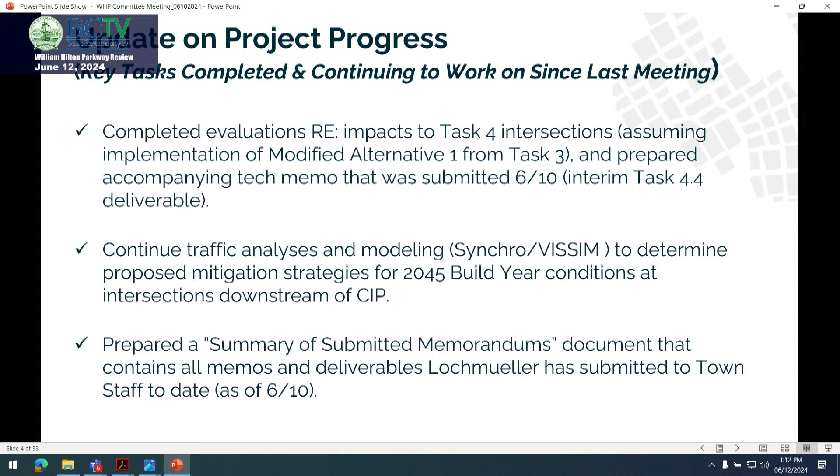From an overall standpoint, I would estimate that we are 75% complete, given that we are well within completion of Task 4.

Task 1, the only remaining item in our scope was one coordination meeting with town staff, and then we can consider that 100% complete. Task 2, as we've mentioned multiple times, is 100% complete. Task 3, we're considering 90%.

The reason for that is we have provided you the deliverable for that. However, we will be submitting or presenting some of those findings to members of council when we engage them formally for the first time next week.

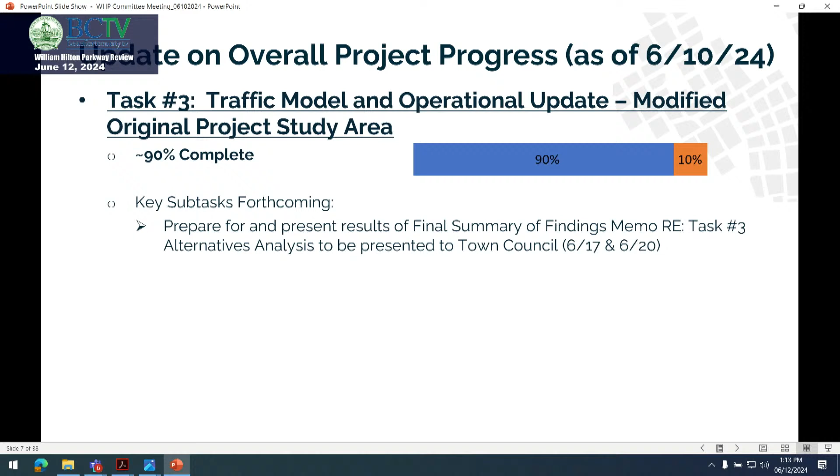After those meetings, we will be able to consider Task 3 100% complete. Task 4, we think we're about halfway done with that because we have an understanding of what the impacts are going to be, and we're working through mitigation strategies for those.

Similar to what we provided to you in Task 3.6, the summary findings memo, that's labeled as Task 4.4 in our scope addendum. We have an interim version that we've submitted to you to understand the impacts earlier this week. We'll finalize that to include the mitigation strategies to formalize the document.

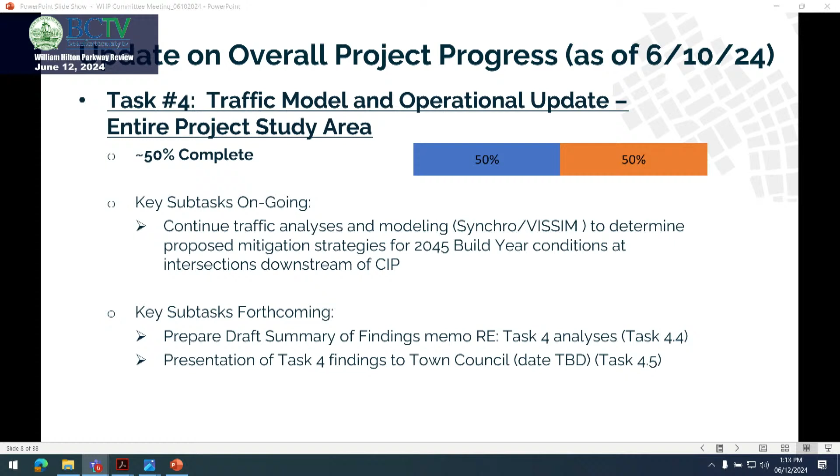And then we'll be presenting that to members of council as well. Task 5 is just the summation of everything we've done to date, put into one comprehensive document to memorialize our work. That'll be after completion of Task 4.

So does anyone have any questions on the progress that we've made thus far? Any questions?

I'm just wondering, we seem to be rushing towards the finish line no matter what, and parts of your work are not finished. Do you expect things to be finished before the 17th of June, or is it going to take more time?

What are you referring to that's not completed? Sorry, what are you referring to that's not completed? Well, you mentioned over there 75% complete, 50% complete.

75 if you consider the entire project. The goal of the meetings that are going to take place on Monday, and then the new council meeting date of June 20th, is to engage the council members for the first time and let them know, and ask any questions, of any project or work we've completed from tasks 1 through 3, which again, we provided the formal deliverable for task 3 at the last meeting.

And then we've also provided to them the interim findings for impacts that Michelle is going to be speaking to today. So we have completed all of the subject deliverables up through task 3, and we've got an interim deliverable ready for discussions with council members for task 4.4.

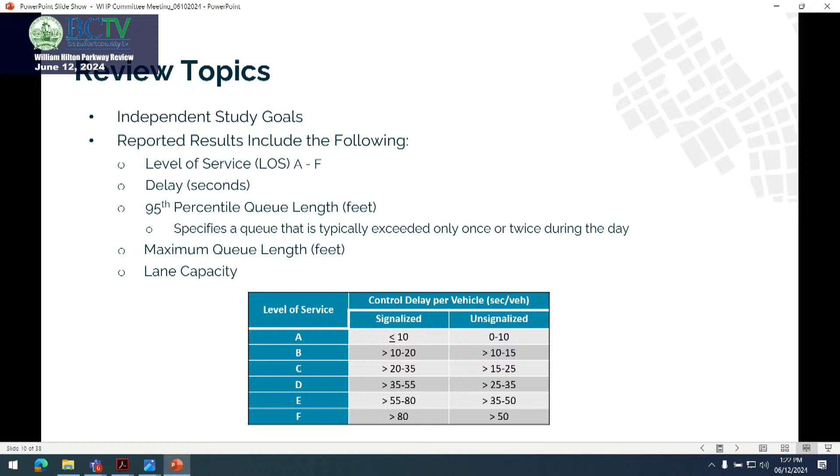So I wanted to briefly review those topics as we consider some of the other impacts that Michelle's going to present after this. If we go to the next slide, there's one more thing I want to review with everybody, which is our traffic volumes.

We have presented these numerous times in various fashions, whether slideshow presentations to this committee, graphics in the appendices of presentations we've given, or included in various reports. Again, I want to reiterate that all of our hourly volumes were collected in 2023, and that has been the basis for all of our scenarios.

These are hourly volumes, not just daily volumes. We do look at both sets of data for different things, but the main bulk of our analysis has been based on hourly volumes. Specifically, we use the 30th highest day for traffic volumes to ensure the analysis is responsible and reflects peak conditions without over- or underestimating any traffic volumes. That is a standard practice.

Kate, I think you cut out. Oh, I'm sorry. And it looks like she dropped. Yeah, she may have dropped.

Michelle, while we're waiting on Kate, would you mind finishing out this slide? I can take over from here. I believe what Kate was saying is that we were using the 30th highest day for our traffic volumes, and that helps. I'll let her join again if she's able.

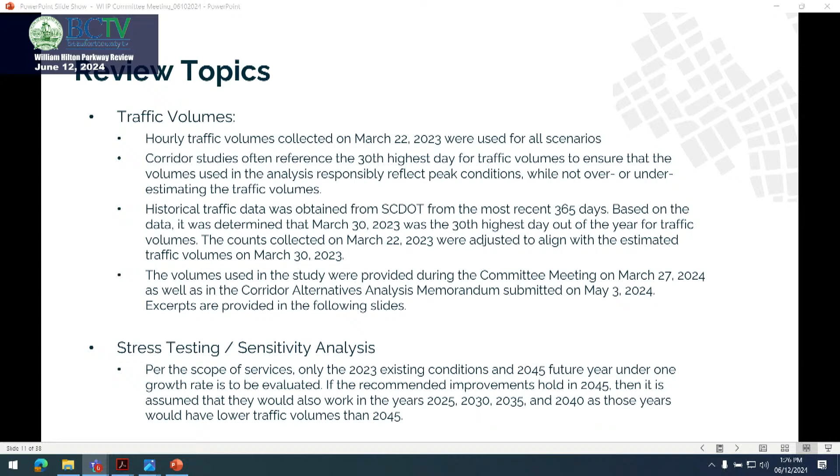All right, do we have any questions? Okay. Does not appear to be any. Okay, thank you very much.

Good afternoon, thank you for having me. Before I get into the downstream impacts, I'm actually going to build off of some of what Kate said.

We have provided some excerpts of our traffic volumes to help show the hourly volumes we used in our analysis. As Kate mentioned, all of the traffic volumes were provided as part of the committee meeting on March 27th, as well as within our corridor alternatives analysis memorandum, which we submitted on May 3rd.

I'm going to focus just west of intersection 9, which is Squire Pope. As shown in the column on the left, which is our morning peak hour, we have approximately 2,800 vehicles traveling in the eastbound direction. This includes those 156 left turns shown in the intersection 9 box in the top left, the 2,620 through vehicles, and the 2 right turning vehicles.

In the evening, which is in the right column, just west of Squire Pope at intersection 9, we have approximately 3,000 vehicles traveling in the westbound direction. This includes the 2,687 through vehicles, as well as the 2 northbound left turns and the 341 southbound right turns to get to the volumes just west of Squire Pope.

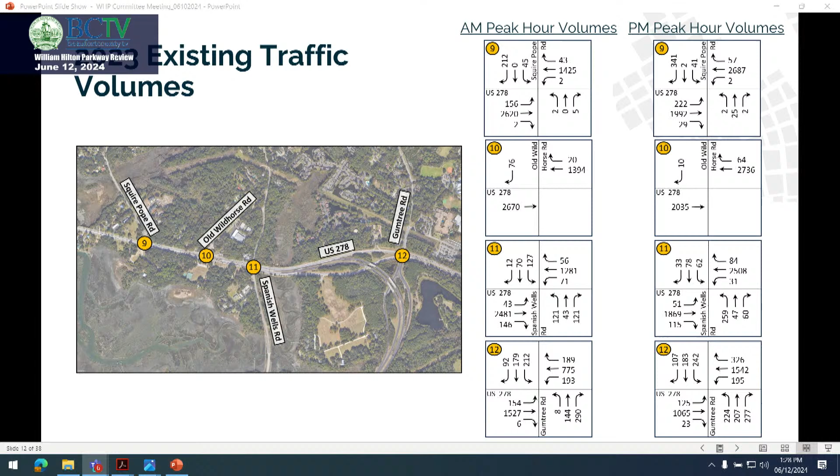We then took those volumes and grew them by our determined growth rate of 0.56%. Just west of intersection 9 at Squire Pope, we have approximately 3,150 vehicles traveling eastbound during the morning, and approximately 3,400 vehicles traveling westbound in the evening. These volumes were used for the 2045 scenarios. These are just an excerpt from some of the major intersections we're looking at. All of the traffic volumes for all of the intersections have been provided.

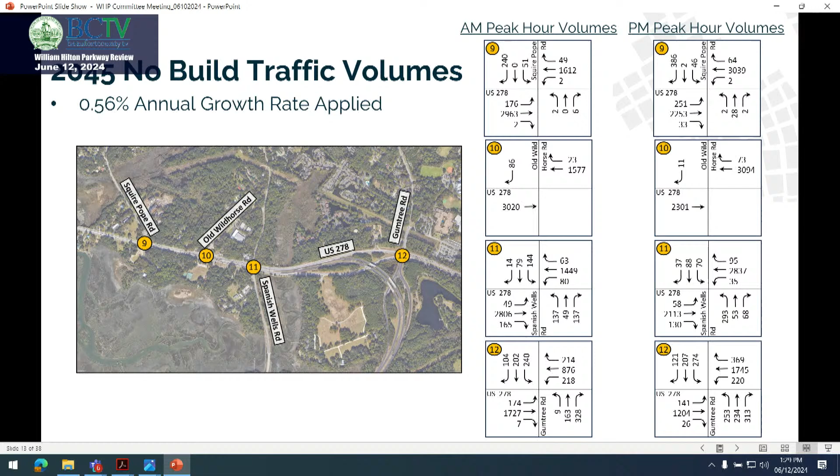Now I'd like to present our findings to date on Task 4 for our scope of services. We previously analyzed 4 alternatives intended to improve operating conditions along US 278 between Moss Creek Drive and Gumtree Road. After review of the findings and discussion with SCDOT, Lochmueller was directed by the Town of Hilton Head Island to pursue Alternative 1, SCDOT Modified Recommended Preferred, with additional modifications to provide a single eastbound left turn lane and a single southbound right turn lane at US 278 and Squire Pope. As you may recall, the SCDOT alternative included 2 eastbound left turn lanes and 2 southbound right turn lanes here. Our modified alternative run reduces each of these to just 1 lane.

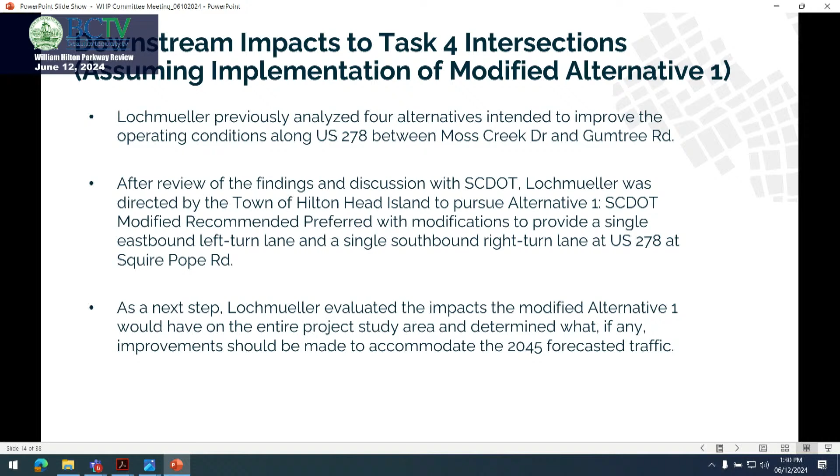We have now evaluated the impacts that the modified alternative 1 would have on the entire project study area, and are working to determine what, if any, improvements should be made to accommodate the 2045 forecasted traffic east of Gumtree and along Cross Island Parkway. This analysis includes the entire study area as shown here. Our previous analysis for the alternatives only included the intersections between Moss Creek and Gumtree. We have now extended our study to the intersections along US 278 through Indigo Run, as well as along the Cross Island Parkway towards Sea Pines Circle.

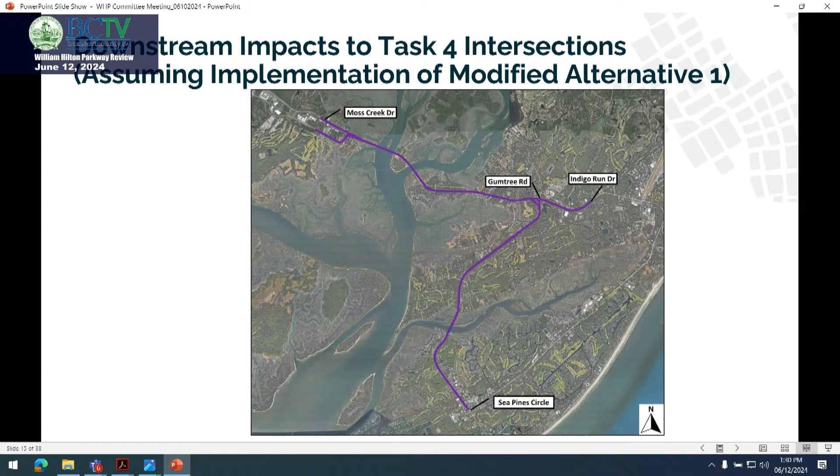We have provided travel time runs for the modified alternative 1, which includes the SCDOT alternative as well as a single eastbound left turn lane and southbound right turn lane at Squire Pope. Before we get into the numbers, I want to clarify that these values are from VISSIM. We have previously presented the 2045 no-build travel times, and the values shown in this table for the 2045 no-build match what we have previously presented for that scenario. However, we have not yet presented the modified alternative 1 travel times. The travel times with respect to the alternatives we previously presented were completed using Synchro, not VISSIM. The intention of those Synchro travel times was to serve as a comparison between each of the alternatives we evaluated, so alternatives 1 through 4.

They were not intended to serve as final travel time calculations, as those values were to be calculated using VISSIM as part of Task 4, which we are now in. We also noted previously that we would expect the VISSIM results to be a little more pronounced compared to Synchro, because VISSIM is a micro-simulation tool, which is able to accurately replicate individual vehicles and their interactions within complex traffic streams better than Synchro.

As such, our final travel time results for the modified alternative 1, again assuming no changes along US 278 east of Gumtree or along Cross Island Parkway towards Sea Pines, are presented in this table. These values do include a thorough evaluation and optimization of the adaptive signals along US 278 within the modified alternative 1 intersections, to help us ensure the signals are operating as efficiently as possible.

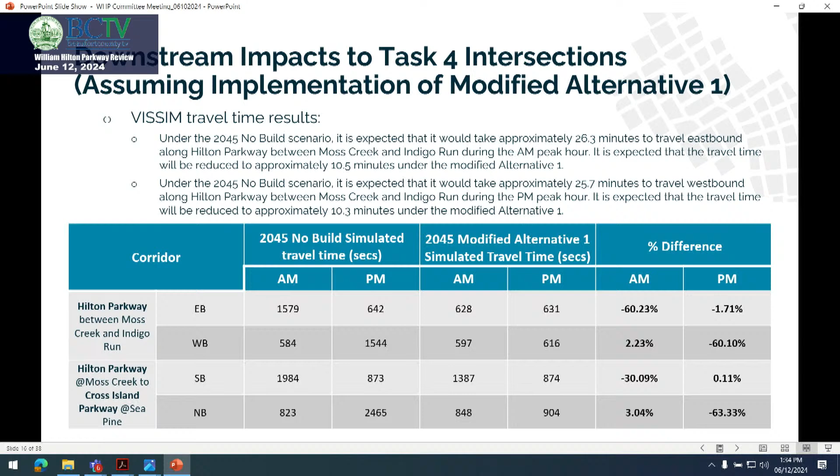So we've provided some videos here to help you visualize the 2045 modified alternative 1. Again, we have no improvements along US 278 east of Gumtree or along Cross Island Parkway. So this is in the morning, in the eastbound direction, on Hilton Parkway.

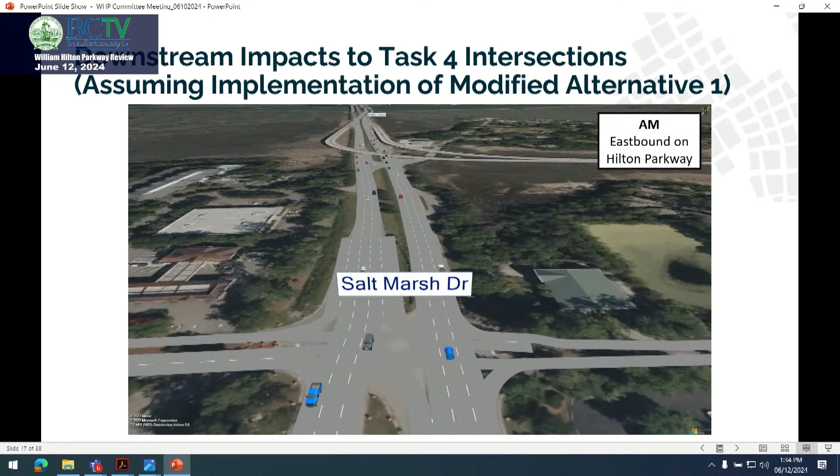So as you can see here, the 6-lane section is operating acceptably. We're not seeing any queuing back, from what we saw in the 2045 no-build, as well as in some of the existing conditions.

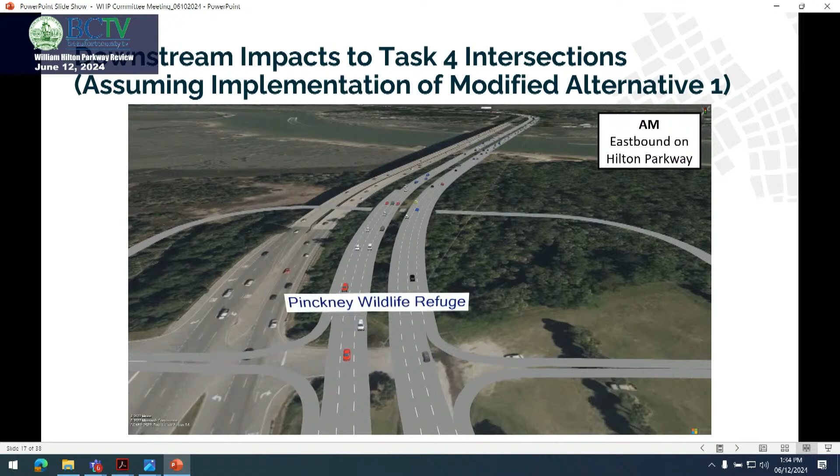As we go towards the Pinckney Wildlife Refuge, this right-in, right-out is now also operating well. You can see, as you look in the video, the platoon of those eastbound vehicles. There's quite a few eastbound vehicles, but the 6-lane section is able to accommodate them.

You can see it's a steady stream of eastbound vehicles in the morning. And then as we start approaching Squire Pope, we can see that it's operating pretty well.

The changes with the modified alternative 1 are at this point in time. Again, this video is just one snapshot. It's not reflective of the entire hour, but you can see generally everything is working well. The platoons are typically able to, at least in this area, clear within 1 cycle length.

And now we're getting into the impacts starting downstream here. We did have improvements at Gumtree, which are reflected here. And then you can start to see those downstream impacts as you look towards past Gumtree, up towards Wilborn Road. We are starting to experience some queuing at this point.

You can see some long queues at Wilborn and Jarvis Park, and also through Pembroke at this point too. You can see a constant stream of vehicles.

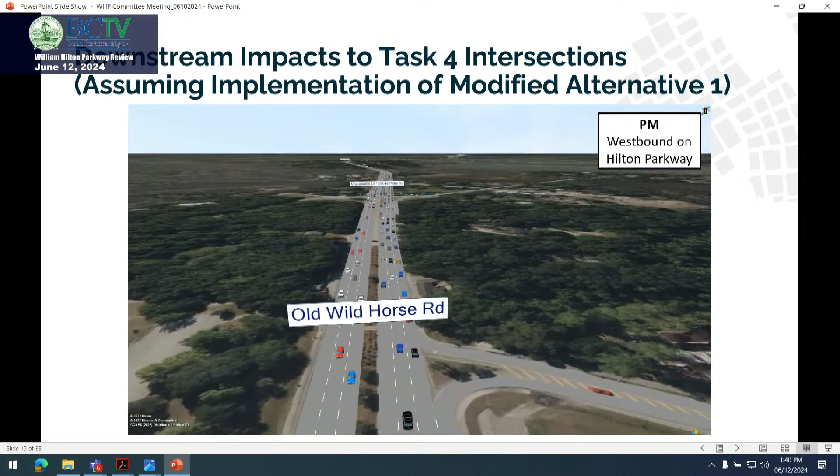And that agrees with the travel time runs that I just presented to you. Once they start hitting the greens, we're able to get them through these intersections now.

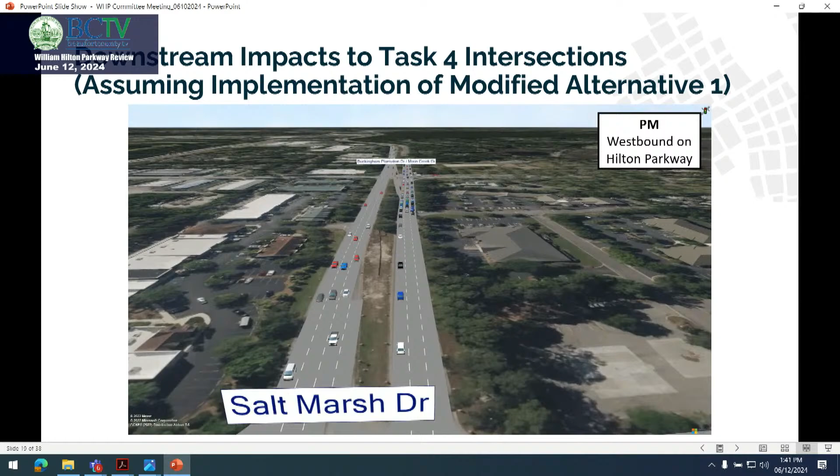And this will follow through to Moss Creek. So as you can see here, it's largely expected to operate acceptably all the way from the beginning at Gumtree through Moss Creek. You can see the platoon starting to clear from that signal, which just turned green.

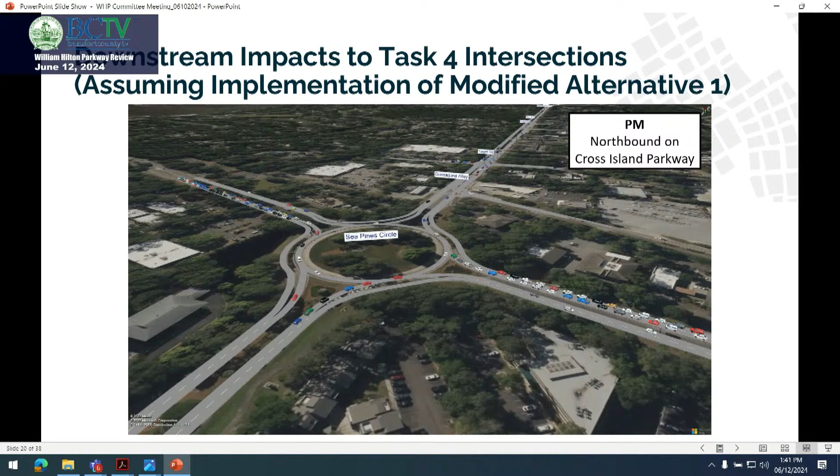And then we have one more video for you, which is the PM along Cross Island Parkway. Here at the very beginning, you can already see some of the queuing that we're realizing in the 2045 scenario at Sea Pines Circle. Both our eastbound and westbound directions are really struggling to get into this roundabout due to the large number of vehicles entering in.

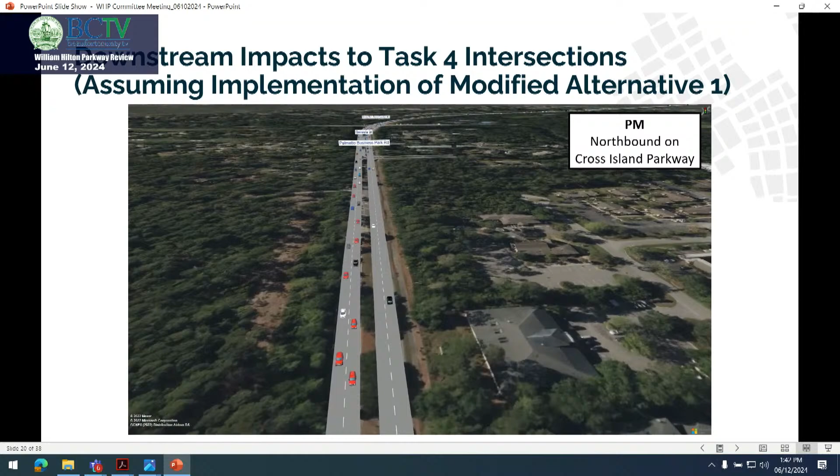They just can't find a gap to get in there. But one thing that's different here in the PM versus the AM is that while there's queuing at the roundabout, along Cross Island Parkway at Palmetto Bay there's not too many issues here in the PM. The queuing all happens outside of it, whereas in the morning there was queuing southbound along this road because the roundabout was pushing it there. Here it's the other directions having impacts, just due to the direction of flow in the AM versus the PM. We'd expect that any improvements to Sea Pines would help mitigate all of these issues we're seeing.

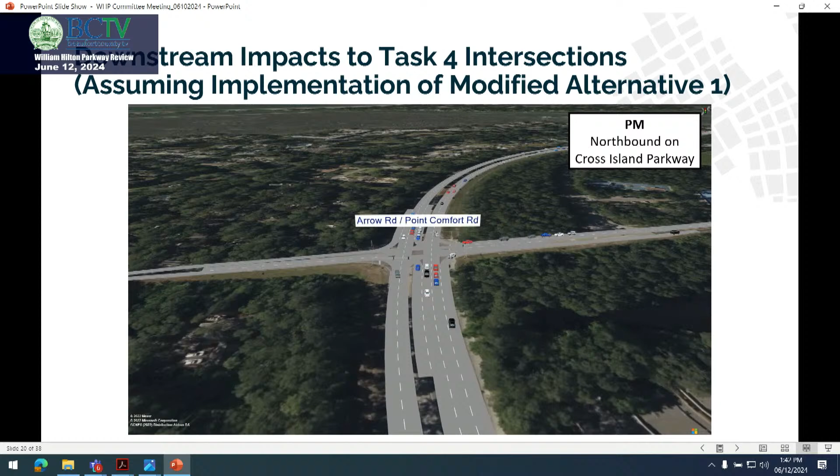Okay, so now to put some numbers to this, the operating conditions results from VISSIM for the modified Alternative 1 are provided in these tables here. We've included the operating conditions for each intersection in the appendix of this presentation for reference. However, we've provided the results for intersections of note here, some of our key intersections that we're looking at.

As shown here, the intersections between Squire Pope and Gumtree are expected to operate acceptably overall during the AM and PM peak hours. Each of our signalized intersections is expected to have an LOS D or better, which is our target LOS for an intersection overall. And the individual approaches are expected to operate with an LOS E or better, which, as Kate mentioned, is typically considered acceptable during peak hours for some of the side street approaches.

But while the intersections overall are expected to operate acceptably, there are a few movements we've called out here that are expected to either experience long delays, resulting in an LOS F for that specific movement—again, not necessarily for the approach or the intersection—or maybe some long queues.

So at Squire Pope, I'll focus for a minute, because this is where we put in one eastbound left turn lane and one southbound right turn lane. We worked a lot on this intersection, especially with respect to the adaptive signals, to help make it run as efficiently as possible. But even still, we're expecting the eastbound left turn to fail during our AM peak hour, largely due to the delay at that point. The southbound left turn, part of the capacity with the southbound approach there, is also expected to fail during the PM peak hour. And the southbound right turn, we're expecting to have some long queues of over 500 feet during the PM peak hour.

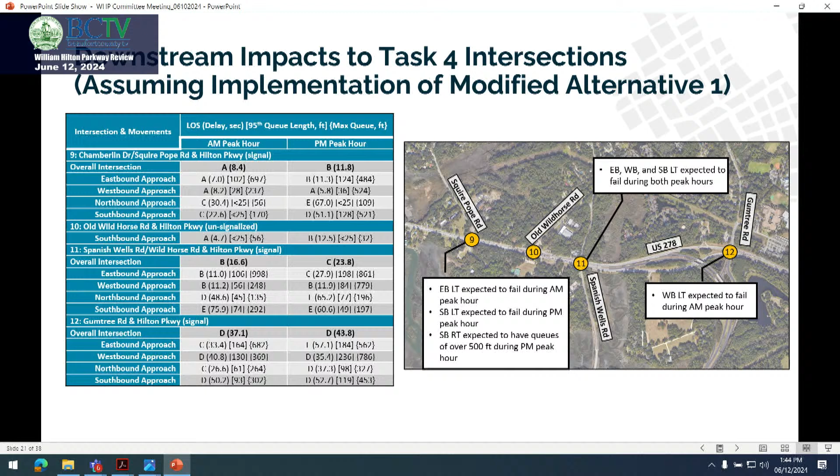So on this slide here, again, we can see overall, if we look at these black bolded numbers for the intersections that are signalized, we're expecting them to operate acceptably. Each of the intersections should have an LOS D or better, and generally each of the approaches will also have an LOS E or better. There is an exception highlighted in red for the northbound approach at Wilborn Road and Jarvis Park. Before I go any further, we've made no modifications to these intersections here—the intersections in the previous slide had the modified Alternative 1 improvements, but these intersections have no improvements to them. This is kind of a no-build of the modified Alternative 1.

Can I ask a question? Yes. So how does this differ from what we have today?

These have the 2045 traffic volumes in them. So you're operating on about 4,000 vehicles per hour? I wouldn't say 4,000 exactly. We have our 2023 existing traffic counts, grown annually by 0.56 percent from there. I can pull those numbers up for you, but it would take a moment.

What I'd like to understand is, except for the adaptive traffic system, there are no changes to the roadways, left-hand turns, or right-hand turns. It's just the same as we have today, right? Correct, these intersections remain the same.

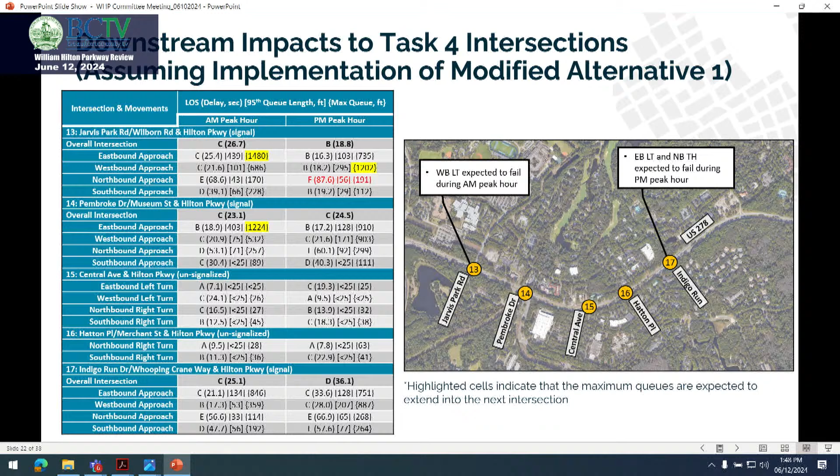I've also called out Sea Pines Circle. As you saw in the video, there's a lot of queuing we're seeing at this circle, and we're expecting that in 2045 as well. Again, we've made no modifications to the lanes or striping here. This assumes it is as it is today, only with the 2045 traffic volumes.

You can see in the morning some approaches are failing, specifically the eastbound approach, which is what we saw in the video. The southbound approach is not failing; however, we saw long queues for that southbound approach, and those queues hurt the side street approaches as they struggle to find a gap because of the roundabout, making it hard to execute a left turn from an unsignalized approach.

So at intersections further north, like Dunnagans, as those queues on the southbound approach extend all the way back, they start to struggle to make a left turn out. We would assume that whenever we improve this roundabout, a lot of those issues would be mitigated simply by fixing it. We might not actually need to look at or improve any of those other intersections, but we're still testing some ideas here.

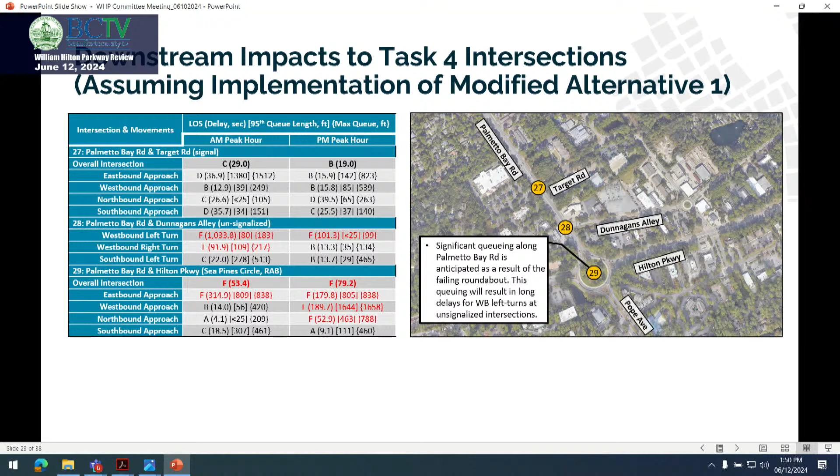As far as next steps, we've shown you the results of the modified Alternative 1 and the impacts it's having on the intersections downstream of Gumtree Road and Cross Island Parkway. I've highlighted a few things today that we're looking at further to see what, if any, improvements we could make that might help.

These improvements include reconfiguring intersections or turn lanes to potentially improve efficiency, and we may also look at adding lanes to help improve capacity. But most certainly, we are looking at improvements to the Sea Pines roundabout, as it's really performing the worst out of all the study intersections at this point, so we're going to be looking at that closely.

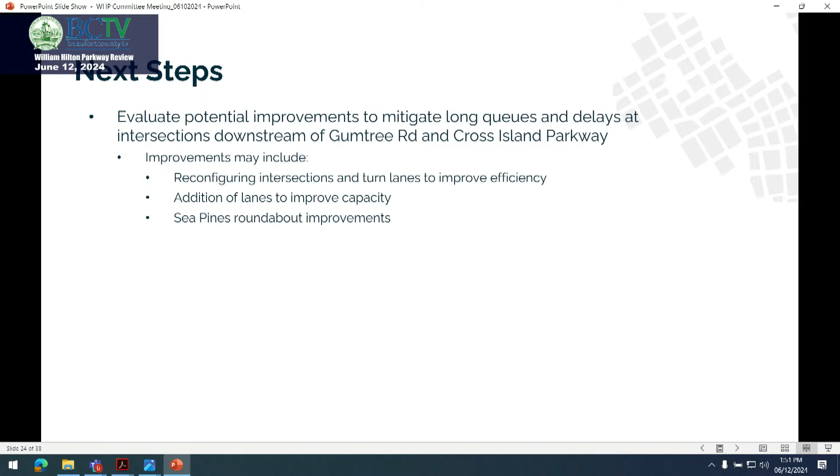And that's everything that I have for you, so we're happy to take questions. Questions from the committee?

So with these, you were talking about these improvements on that preferred alternative from SCDOT. Have you evaluated that? Have you put in all these different ideas to see what that would do to the traffic volume?

So the traffic volumes would stay the same. That's kind of one thing that's held true this entire study - yes, the flow of traffic. We have put in all of SCDOT's modified preferred alternative, all of their recommendations that came out of there. That is now in our VISSIM model, as well as the modifications we mentioned. Squire Pope now is only going to have that one eastbound left turn lane as well as the one southbound right turn. So that is in our VISSIM model. And we also have the improvements at Gumtree, which we recommended as part of our task 3 in there.

And those are the only improvements right now that are in our VISSIM model. We have started to model some potential improvement for the other intersections downstream and Sea Pines. We just haven't finalized those models to present results yet.

And what about when you go westbound from the Cross Island Parkway onto Business 278? That's right now one lane. Have you tested on the model what it would do if you have 2 lanes coming down into 278? No, we left that the same. Why not, if I may ask? I believe, from what we're showing here, it's not needed.

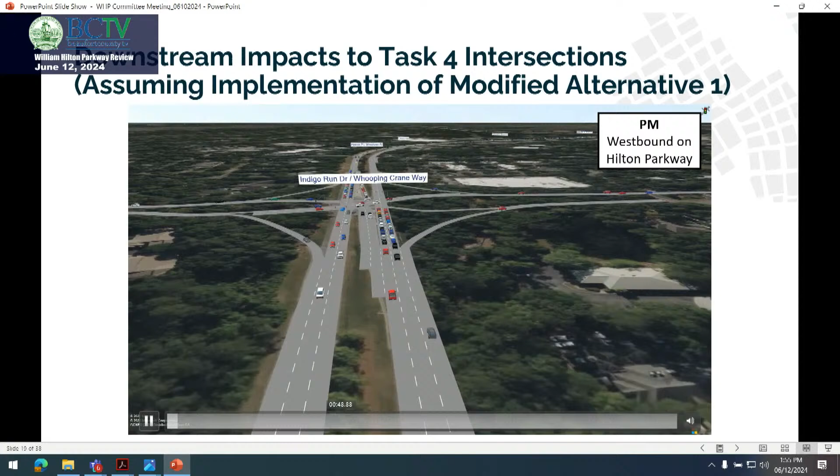I think we're trying to go back to topics we've already covered in prior discussions. Up to this point, there is not a proposed situation where the bridge would be 3 lanes in each direction flowing into a 2-lane in each direction receiving roadway. As you indicated, that would cause congestion, and that's not what Alternative 1 suggests. Alternative 1 suggests that the on-ground roadway also be widened to 3 lanes in each direction to receive the proposed bridge lanes. So no, that was not modeled, but that's not currently an alternative that is being proposed.

Yeah, I think everybody is a bit of a traffic engineer, but we are not. And so, from a novice point of view, you would think that if you have this slab of a bridge coming down with 3 lanes, having to force itself into a smaller roadway, that creates issues, no?

I don't think that's a proposed solution. I know, but I mean, we'd like to have your view on that, as a consultant.

Certainly, yes. Our view is that that would not be an agreeable final solution. All the solutions we've modeled in any of the alternatives 1 through 4, or alternative 1 specifically, would not have that condition. They would have 3 lanes in each direction on the bridge, meeting up with 3 lanes in each direction on the roadway on the ground.

And now that we're on the topic, have you had the experience of converting one breakdown lane into a regular roadway during peak hours on other projects, and how did that work, if you've done that?

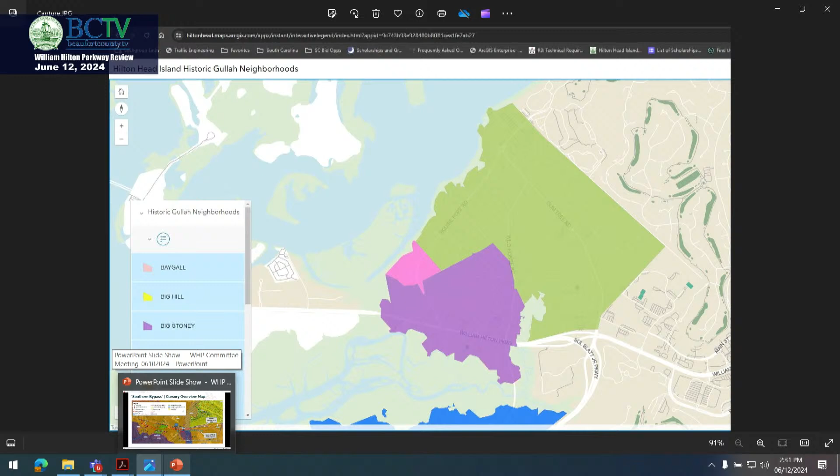And we've distributed the other drawing to the town council. You're missing the point—everything in that purple shaded area is within the traditional cultural property. It is comprised of Big and Little Stoney communities. Any impact within that area, regardless of whether it's town or privately held, is an impact to that traditional cultural property. So we can't say there are no impacts—there are impacts.

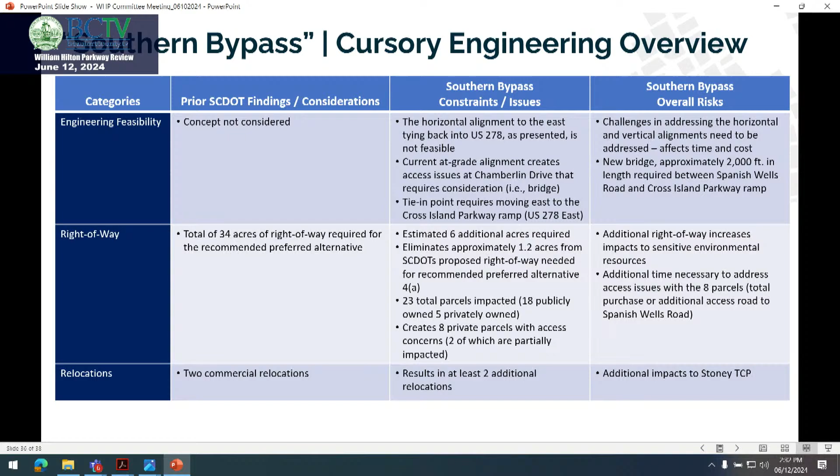That would be a new roadway alignment outside of the Hilton Parkway current right-of-way that would impact properties. At the request of the committee, we had Mueller do an evaluation of this configuration. It was presented to the committee. There were additional 8 private properties impacted, I believe, with their own assessment, and up to an additional 6 acres of property. That's based on the old one.

Look, I don't want to get into a contest with you here. I'm asking for some respect. You made a statement that there's no impact in Stoney—there are impacts in Stoney. You said there's no right-of-way needed for this project—all of that requires right-of-way. A new roadway is going to require dedicated right-of-way to install the project. No Honeyhorn impact? Honeyhorn impact means if you impact 1 square foot of that property, not just if it impacts the area where they hold festivals.

This, I know it's been changed, but this configuration would never be permitted in that alignment. It needs to tie back into the business route in Cross Island, and would require an overpass at Spanish Wells and tie back.

You're reading from the wrong chart. I'm sorry, I mean, you can go on. Well, I'm going to go on.

It does impact Honeyhorn, which is another 4(f) resource. The entirety of that purple traditional cultural property is a 4(f) resource. Any impacts within that area are critical to being able to go through the NEPA process. One charge at the very beginning of the scope of work that this committee recommended and town council approved was that it had to make it through the NEPA process.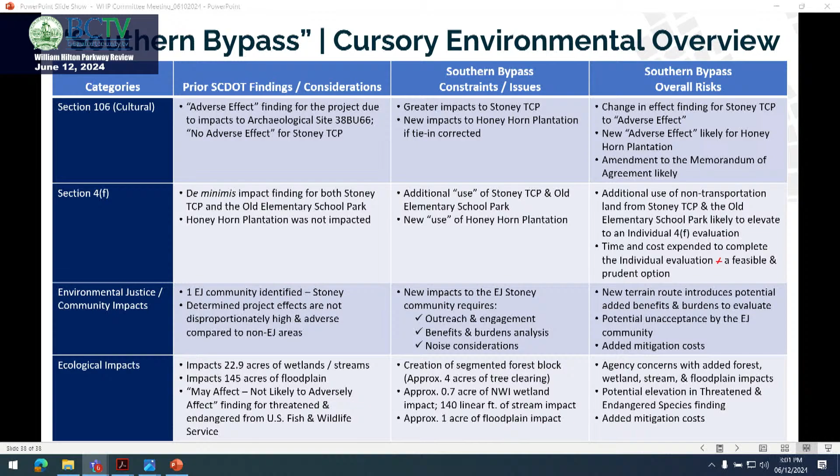Just a couple points of clarification, Chad. One part of this with right-of-way is that within the William Hilton Parkway corridor, the right-of-way is already really a transportation use, whereas if you were to go with a new alignment south of William Hilton Parkway, you would need to change it from a non-transportation use to a transportation use, and that's another red flag, correct?

True to a degree. I'd have to look at all the right of way being acquired. Anything outside of a traditional street infrastructure layout, something already classified as a transportation facility, would be 4(f) land acquired and would be a concern.

You can certainly acquire land within the transportation footprint without it being an issue because it's not converting. When I say the word 'use,' I'm talking about conversion from a non-transportation use to a transportation use. It's about incorporating elements of the 4(f) resource into a transportation facility. When you convert something from non-transportation to transportation use, and it has federal oversight, like federal transportation or federal highway oversight, then 4(f) becomes an issue.

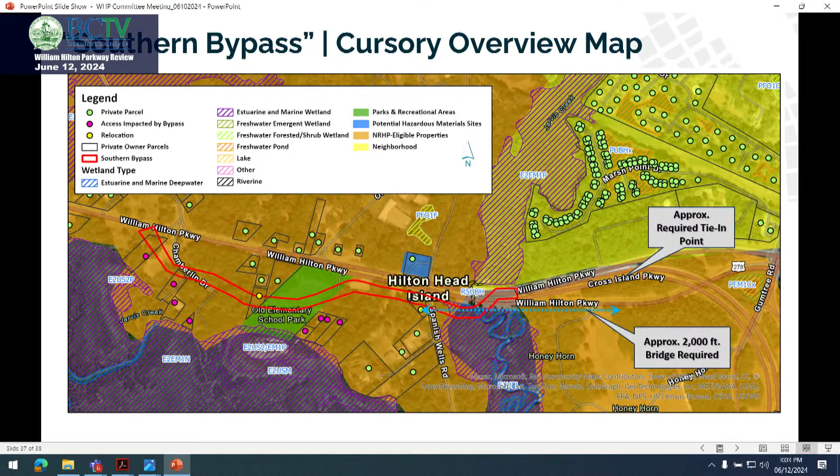Correct. It's not shown on that rudimentary sketch we had up before, but there would have to be some way to tie back into the Cross Island Parkway, following that blue line somehow. That would be outside of what would be considered the existing transportation footprint, so you'd be incorporating non-transportation 4(f) land into a transportation facility.

Now, once you direct the line back north and connect into where it says approximately required tie-in point, that would not be as much of a concern because that is already within a transportation element.

Just for reference, with our elevated bypass, that was the reason we noted it would impact the Honey Horn Plantation, but that's why we sought an opportunity to utilize this area already designated as a transportation land use. Yes, correct.

I'm sorry? Is your colleague looking at this slide, these plans, or the new one where the track is completely different? As we mentioned before, when you provided that prior to the last meeting, there was a new alignment.

As you said, it hugs the William Hilton Parkway corridor. But if you look at that, you're still within all that TCP area.

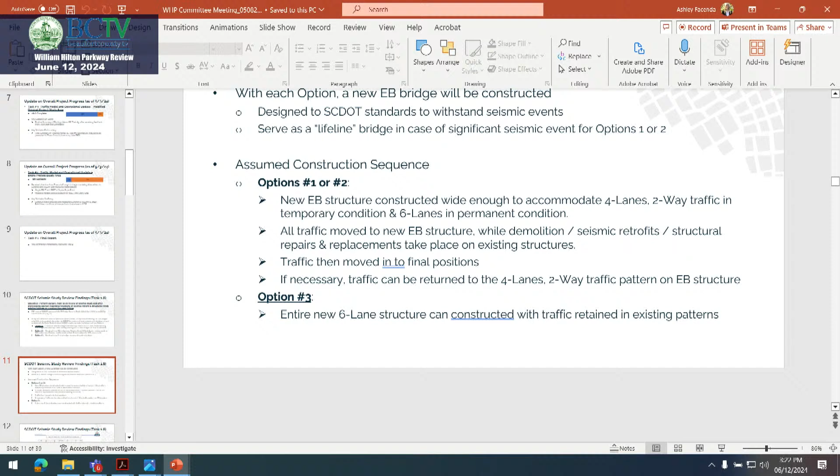That lifeline would then change - let me pull up the cross section so you can see what they're talking about. The retrofitting takes place underneath the bridge.

So here's what this new, quote unquote, lifeline structure was going to look like. This was providing the temporary cross section while rehabilitation efforts were taking place on the existing bridges. You had 2 lanes in each direction, mimicking what you have today. Once all the rehabilitation was completed, this new eastbound lifeline structure provides you your 3 dedicated travel lanes and shoulders on either side. The difference between options 1 and 2 was that in option 1...

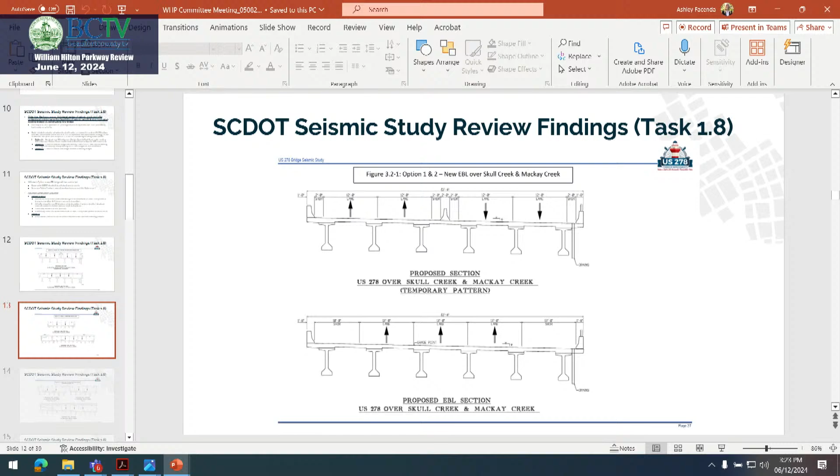The westbound structures over Skull Creek and Mackay were just going to be rehabilitated. In option 2, they were going to replace the bridge over Mackay, and that was the delineation between the two. If you look at the differential in cost, option 1 - you're rehabilitating existing structures, so your initial cost is lower, correct?

But then you're going to have future maintenance costs because you're going to have to replace that bridge 20, 25 years down the road. User costs were - I don't have my notes for what that was. That includes time delay for motorists and some other items, and then maintenance costs associated with that.

Option 2 was more of a front-end cost because you are going to be replacing the westbound Mackay structure and then just rehabilitating the Skull Creek. Then you can see future cost is less because now in the future you're just replacing one bridge versus the other. If you look at the maintenance costs, you may wonder what the difference is with this new structure.

It's because the existing structures have a substantial amount of steel in them, whereas there'd be less steel-based structures and more concrete. So if you look at the total overall cost - and that's without cost to seismically retrofit one of these, which is just going to be a higher delta when you compare it to building new - 50 plus million here, 40 plus million here, and it's going to take longer to construct.

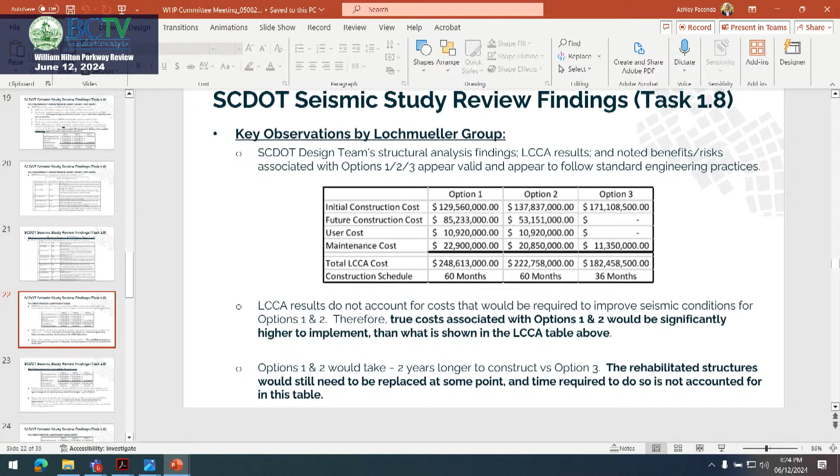So how did the initial construction costs - where do those numbers come from? Where's the breakdown on that?

We can provide you with the seismic study that we were provided. No, is that out of the seismic study? Correct, yes. In other words, you just accepted that as an acceptable number? Correct. You didn't check that number? Part of the scope was we haven't been provided any historical data like cost breakdown from the DOT.

That's one thing that is very difficult to obtain. Part of the scope was to take this and provide our professional opinion - did it appear to meet standard engineering practices? Do their findings appear valid?

In other words, let me understand - you took that number, 130 million, or 129 million, as gospel because you didn't check it? We were not asked to go back, because we would have to go back through and do an incredible amount of critiquing on a design that we had no part of. What we focused on - did we get those numbers from DOT, get all the breakdown on that 129 million?

We could look in the study, but what we're focusing on is just this, which makes intuitive sense - you would have a lower initial cost at the front end because you're replacing fewer structures. This is significantly more because you're replacing all of the bridges.